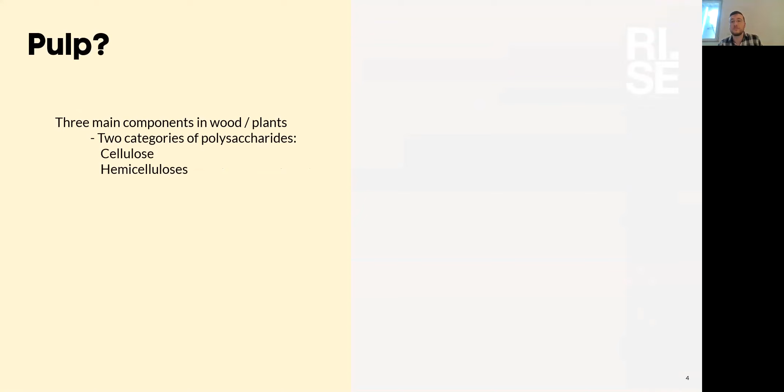Pulp is usually produced from wood, though it can be produced from other raw materials, and it has three main components. Talking about wood specifically, there are two categories of polysaccharides: cellulose and hemicellulose.

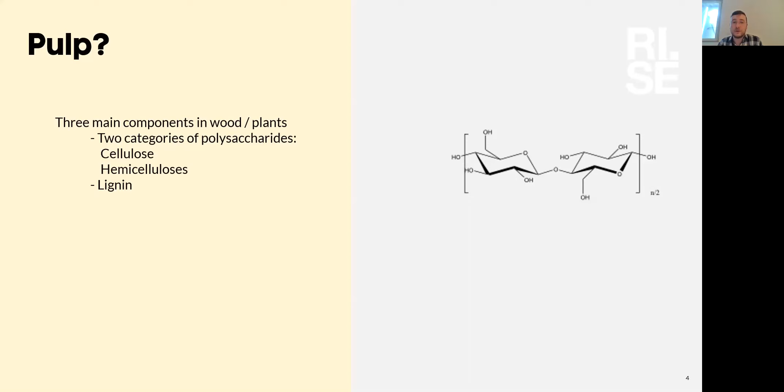Here is a picture of what cellulose can look like. I haven't included hemicellulose because it's not necessary for today. The third component from wood is lignin, so here is lignin.

When we make pulp, what we want to have is basically undamaged polysaccharides—well, it's kind of a utopia to say that, but we want those polysaccharides to be as good and as long as possible. If you look at the picture, you see the square brackets; it just means it can be super, super long, and the longer, the better.

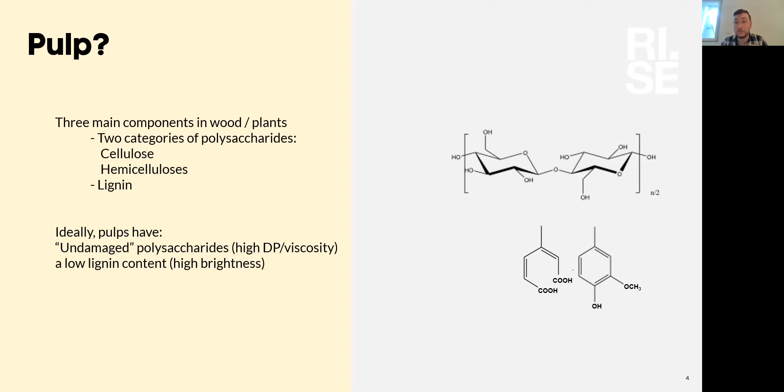For a good pulp, we also want low lignin content. Lignin is kind of a glue that is colored, so we basically don't want it for many applications. Unfortunately, when we remove the lignin, we also tend to degrade the polysaccharides and cut them, or lose some of them.

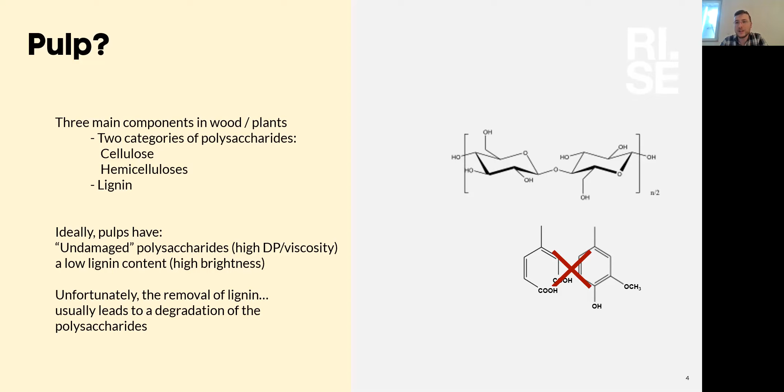Overall, the industrial practice to produce pulp has right now quite stabilized, and you can find several processes, but one of the main processes is the kraft process.

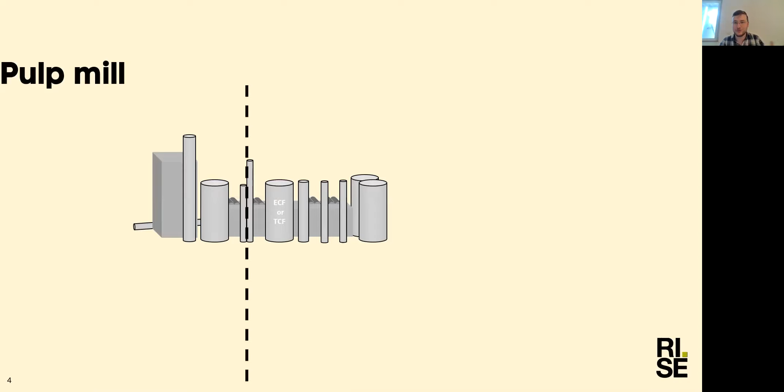So this could be a picture of a kraft mill. You don't get all the elements of the process, but some of them. If we look at this industrial mill, you can basically divide it in two: on the left you would have the cooking, and on the right you would have the bleaching.

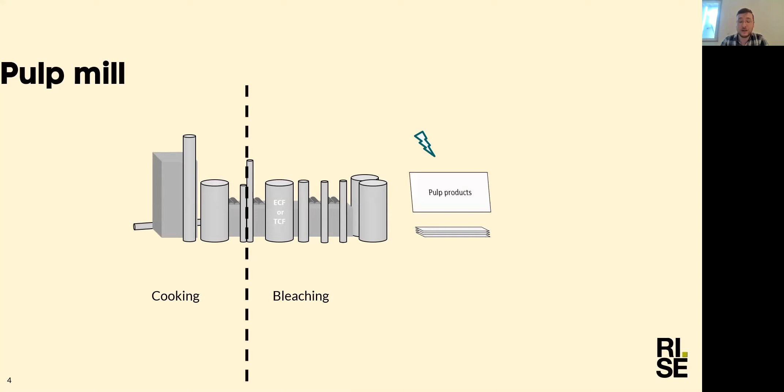The pulp mill is quite robust as a process. It has multiple products, such as pulp obviously, but a pulp mill is also a place where you can produce energy and send it to the network. On the other hand, the pulp mill also has a high consumption of water, and this water that is consumed then has to be treated in a dedicated plant. The pulp mill also has emissions to the air.

So there are a few topics that are a little bit off with pulp mills. I cannot say that pulp mills are not clean, and I cannot say that they are the greenest possible, but I can really tell you that they are getting better and better, and that a lot of changes have occurred during the last decades.

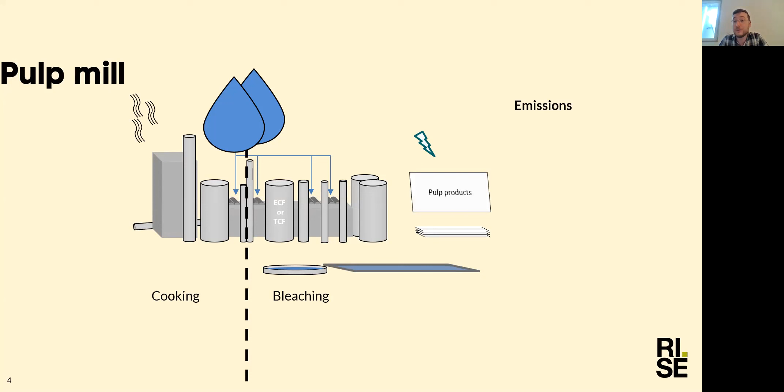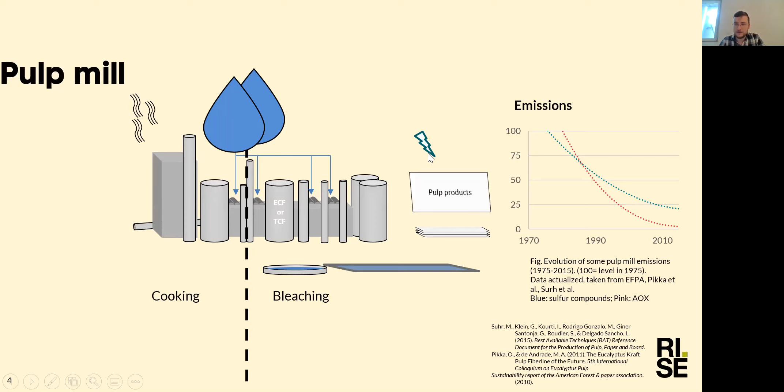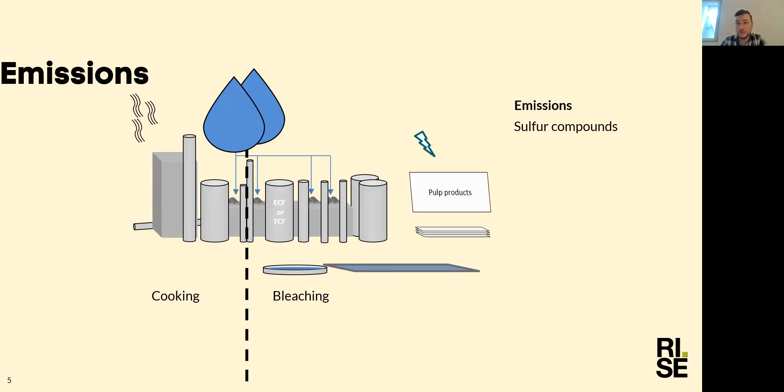In spite of those efforts, the pulp industry is still perceived as a polluting industry. Here are a few emissions you can list, like sulfur compounds that are responsible for the bad smell, amongst other things. We have NOx, specific compounds that can be involved in smog and in acid rain, so they are heavily regulated.

We can talk about CO2, of course—that's too big a topic for today, but I'd love to be working on that a bit more. Of course, the pulp mill will have effluents, as we said. COD and BOD are two indicators of the quality of the effluent: the higher, the worse.

AOX are chlorinated toxic compounds that can sometimes, under some conditions, be found in the effluents of pulp mills. You also have their close cousin, OX, chlorinated compounds that can be found sometimes in some pulp products, directly in the product itself.

One of the problems with all of those emissions—I'm not saying the emissions are too high; compared to 30 years ago, those emissions have never been so low. But at the same time, the very existence of those emissions can pose a problem in the population, and it creates controversies, and those controversies can have damaging effects on the pulp mill, like on the way it runs.

Some pulp mill projects have been cancelled because of the involvement of the population. You also have problems when renewing environmental permits because of this increased awareness of the population. And maybe even worse for the pulp makers, some of those emissions actually lead to technical problems.

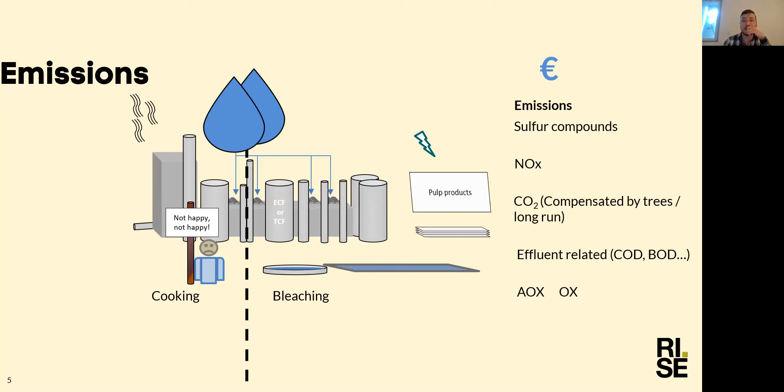So the industry has been fighting a lot to find ways to mitigate those emissions, trying to find new strategies to recover air emissions, to burn them again, trying to deal with effluent in another way, trying to recirculate, etc. But maybe there's another way to look at those things. I will take the example of sulfur compounds and of AOX, and we'll make together this table where we will put the emission and the reason behind this emission.

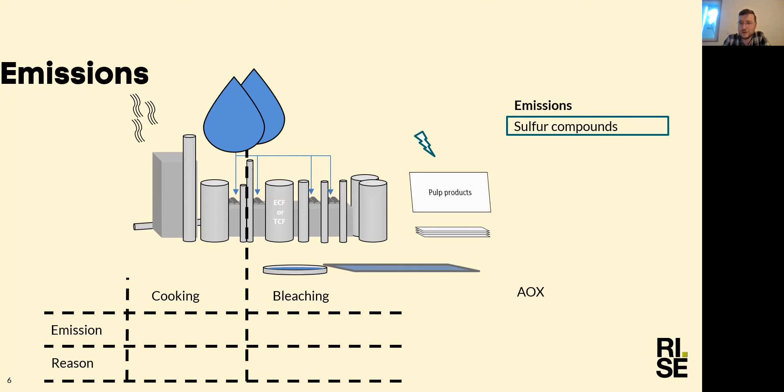If you look at the sulfur compounds, the very reason why you end up with emissions of sulfur compound is because at the beginning of the process, you add or use sulfur. This one is hydrosulfide, the S is for sulfur. If you look at the table, one of the problems related to cooking is sulfur emissions, and this is related to the use of sulfur.

If you do the same exercise with the AOX, they appear because at the beginning of the process, somewhere in the process, we actually use chlorine-related compounds, namely, in our case today, chlorine dioxide.

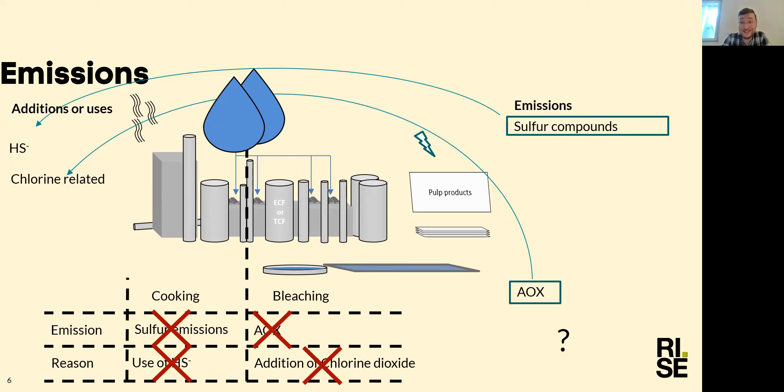Now that we've said that, what can we do? You can see that some specific emissions are just appearing because some compounds are introduced in the process when they were not there at all in the first place. So our belief is that if we stop using hydrosulfide, if we stop using chlorine dioxide, we will get rid of the sulfur emissions, at least most of them, and we would also get rid of most of the AOX. So is it technically possible? Well, with the title of the presentation, you kind of have an idea that yes, we have some ideas about that.

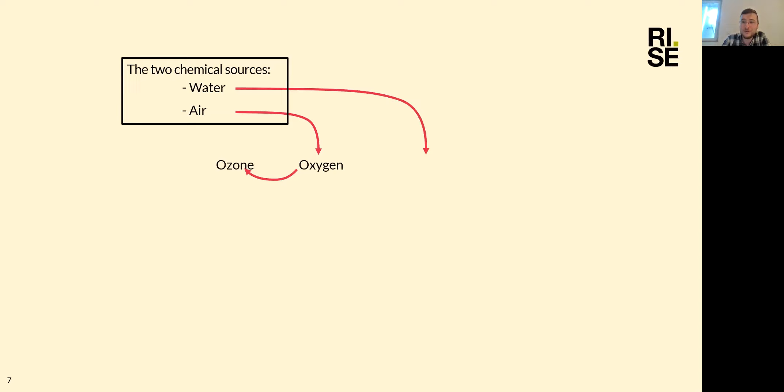We want to have only two chemical sources tomorrow, in the future: water and air. Water and air are quite interesting because air contains about 20% oxygen. If you add a little bit of energy to this oxygen, you produce ozone, a really strong oxidant, probably one of the cleanest. If you combine water and oxygen together through electrolysis, you obtain hydrogen peroxide. Those three chemicals have the full potential to pulp and bleach, to create the pulp and to bleach the pulp. If such a thing existed, it would be called a green chemical island.

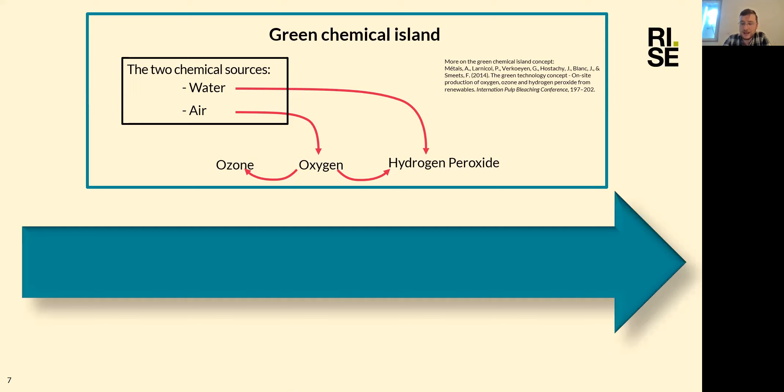If you want to learn more about that, I really urge you to look at Alexis Métais's paper, which is quite enlightening on this concept. So somehow, with those three chemicals, we can do everything. In the next slides, I will present the first volume, called Green Bleaching, showing how to bleach with air and water only. Then I will show a second volume, Green Cooking, and how to cook with air and water only.

Please keep in mind that for the moment it's more of a vision, not exactly a clear and established process, but I hope that some of these ideas will question the current practice of the mills. Back to the things we are going to present, for the sake of time, as I'm talking a lot, as you can see, we will present the volumes in chapters.

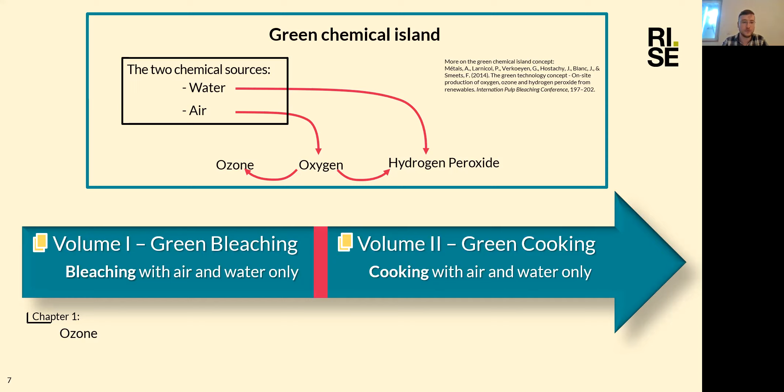The first one will deal with ozone. The second one will combine hydrogen peroxide and alkaline stages. For the second volume, we will talk about oxygen, and actually Claudia will in a few minutes, and then we will talk about the pulping strategies.

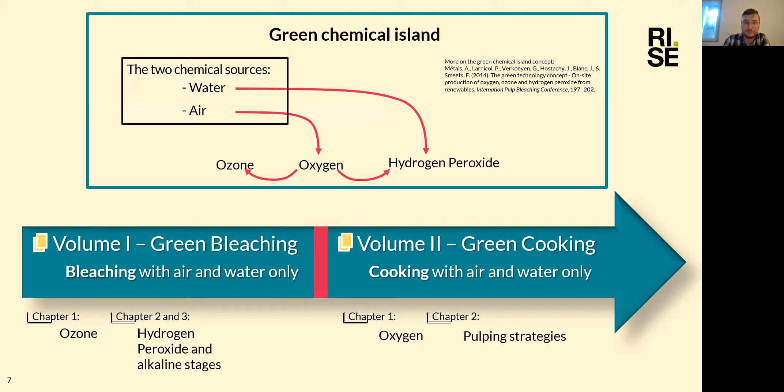So, volume one, green bleaching, chapter one, ozone. There is this common belief in the pulp industry that ozone degrades the cellulose. To tell the truth, it's slightly more complicated.

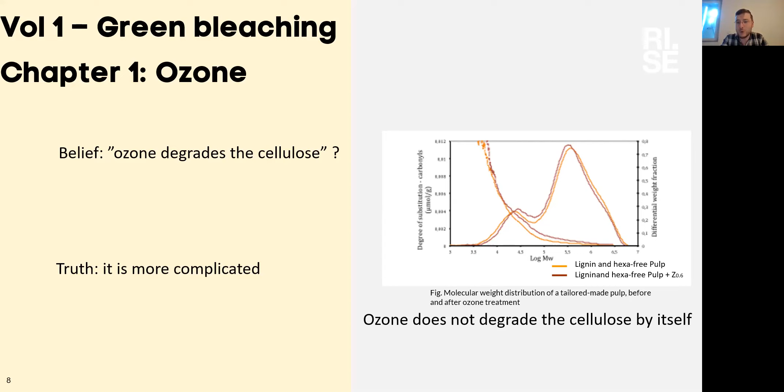For those of you who know more about pulp, you can look at this figure showing the molecular weight distribution of pulp. There are two pulps here: one is a tailor-made pulp that doesn't contain lignin and hexenuronic acid, so it's basically only cellulose. As you can see, the molecular weight before and after the ozone stage are quite similar. So, combined with other results going in that direction, we can easily see that ozone does not degrade the cellulose. It's a bit more complicated.

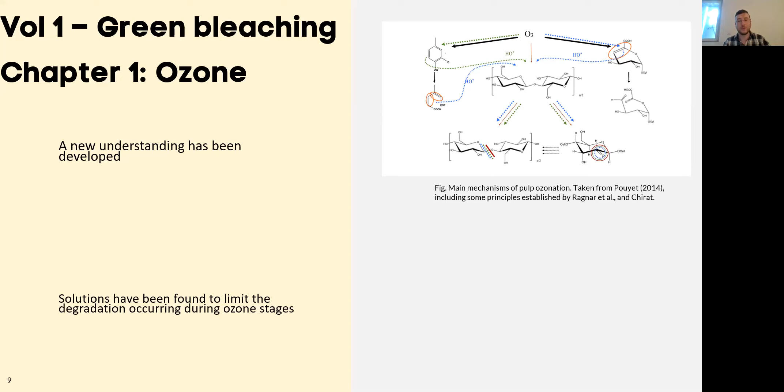To really understand what happens during ozone stages, new understanding has been developed along the years. Ragnar has contributed heavily to that, myself as well. I will not go into the details of this figure; if you want to discuss, you can contact me. But the idea is that we have now identified the reasons why ozone can be a bad chemical for pulp. Now that we know why ozone could degrade pulps, it's time to find mitigation strategies, and I will present one to you.

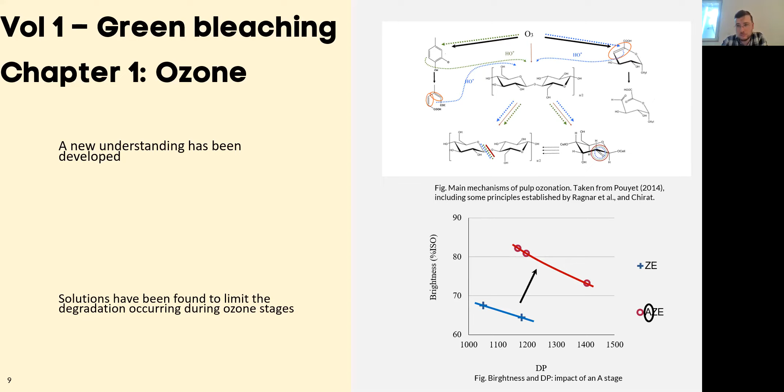So that's just one of the examples of the mitigation strategies that you can find, but this one I think is quite nice to see.

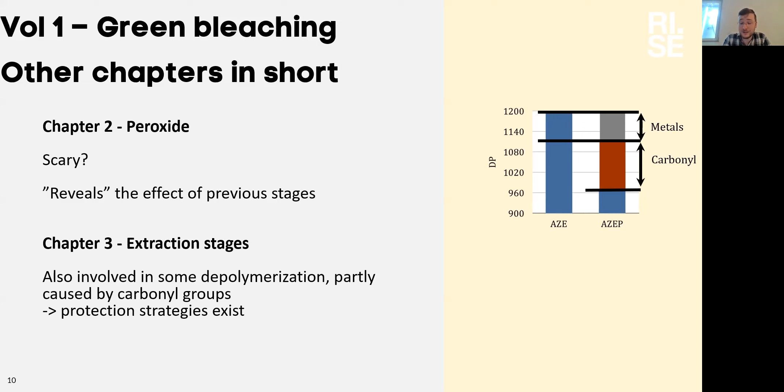The extraction stages can also have an impact on the depolymerization, and this impact is also partly caused by the carbonyl groups. So there are some protection strategies that also exist that I will not detail here. But if you put all of those things together, you can actually reach pulps of high quality.

There are even some more recent results that show that those sequences are actually cost competitive.

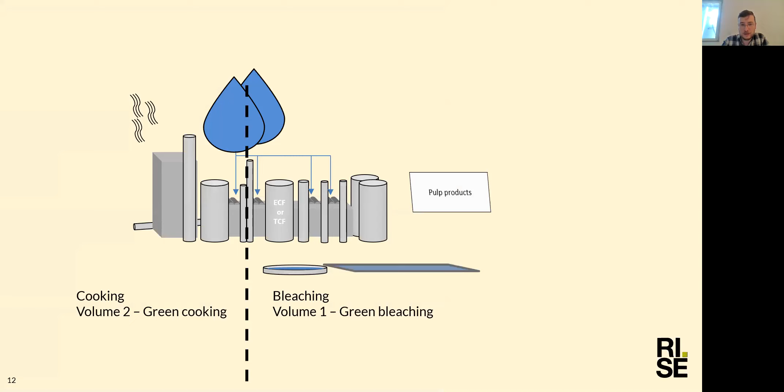Okay, so back to our little mill. Now that we've addressed the volume 1 of green bleaching, let's have a short talk about the second volume that deals with green cooking.

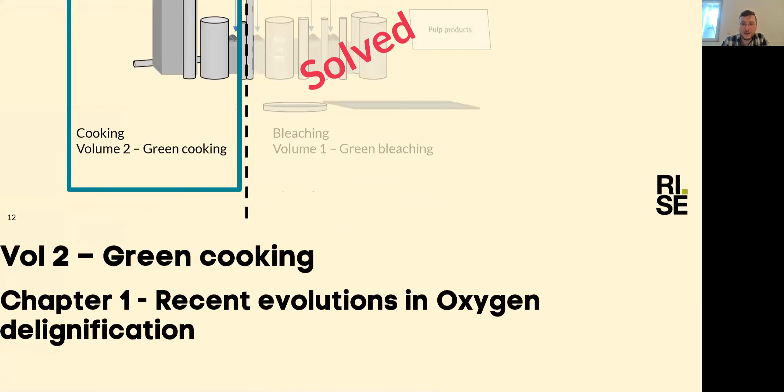Volume 2, green cooking, and I will briefly talk about the recent evolutions in oxygen delignification, and I'll just give you first the oxygen stage goes between the cooking and the bleaching. It can be considered as cooking, considered as bleaching. The point is, it's in the middle.

And you will see in a few minutes results from Claudia. They are really, really interesting and really enlightening, and I will give you a little glimpse into her results. One way to look at those results is to say that you can reduce the cooking time, and reducing the cooking time can actually increase the efficiency of the oxygen stage. Claudia will show you her results, you'll understand.

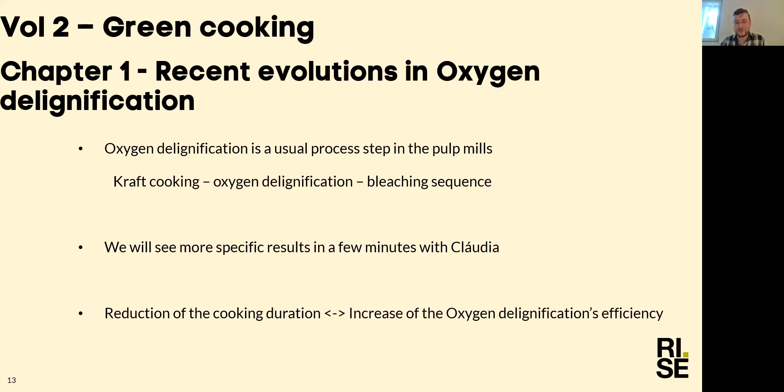So, I don't want to do a big speech on sociology of innovation, but back in history and during the last century now, several pulping processes have existed. You have the mechanical processes, the chemical processes, and the organosolv processes, of course. In the chemical processes, you have the soda cooking, the kraft cooking, sulfite, of course, and I will just talk today about the kraft cooking and the soda cooking.

The kraft cooking contains sulfur, as we've already mentioned. The soda cooking does not. It's basically the kraft cooking without the sulfur and a bit longer.

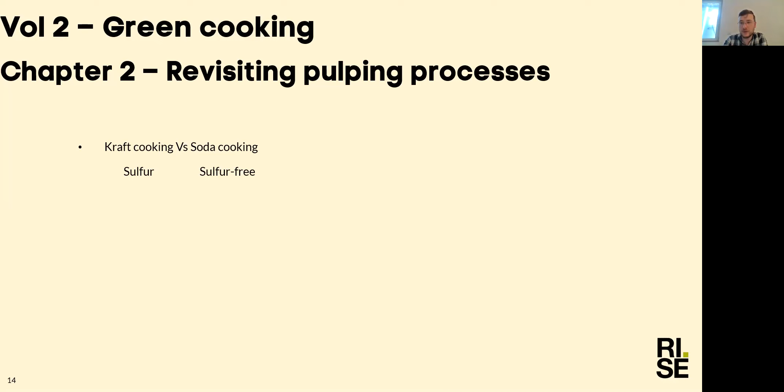Kraft cooking has taken over soda cooking. And the reason why is that kraft cooking is quite good. And it's good because it contains this sulfur. The fact that you have sulfur in the kraft cooking allows for a reduction of the cooking time. Rings a bell, right? And consequently, the pulps are of higher quality, and there is also a higher energy efficiency.

But it's not because the kraft process has taken over that the soda process doesn't work. The soda process works. It's just that it's a bit too long and degrades a bit too much. But if you think back about what Claudia will tell you in a few minutes and the short glimpse I gave you, maybe having this soda process but a bit shorter wouldn't be a problem.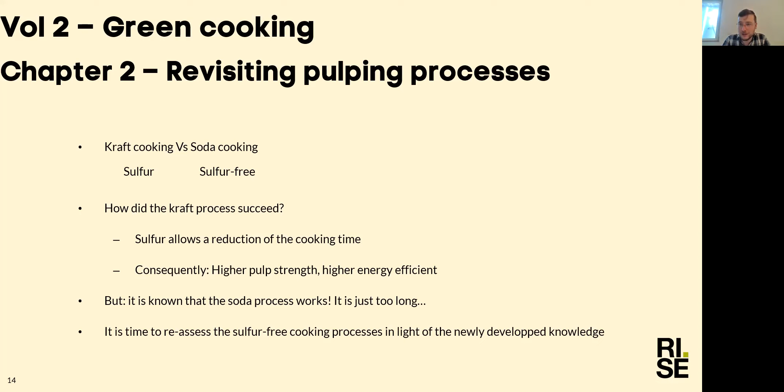So basically, my thought is that it's totally time to reassess the sulfur-free cooking processes in light of the new developments based upon the volume 1 of green bleaching and based also on the knowledge developed by Claudia and other people. So the pulp mill of tomorrow could be a bit like this.

I'm not saying that it will be kraft, that's another topic. But we hope that the pulp mill of tomorrow would have a green chemical island, that it would be able to produce, just from water and air, all of the chemicals required by the mill to turn wood into pulp.

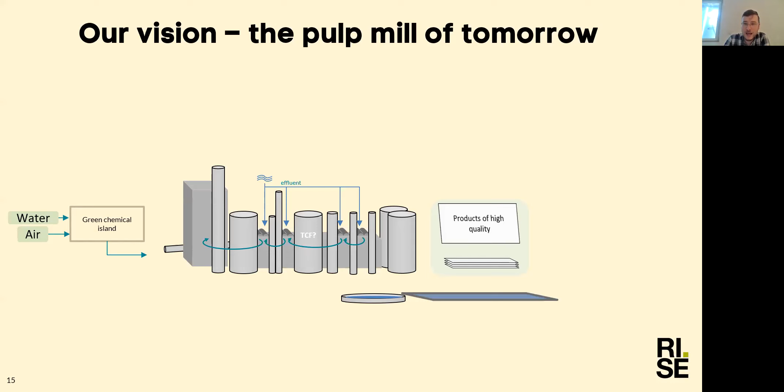We also hope to have a mill with higher water recirculation, and that's even more possible if the sequence doesn't use chlorine. By its design and thanks to the water recirculation, the water uptake could also be lowered by 50%, which is quite interesting. And in terms of cost, those sequences could also be competitive.

We already have results showing that the OPEX is quite similar. And in terms of CAPEX, we also hope that it would be less expensive. The reason why is that if you remove sulfur, you have a recovery system that is way less complicated. So maybe a bit less expensive, at least not more expensive.

Because of the design of the bleaching sequence, it could also be quite a flexible sequence, quite responsive to changes. And overall, the effluent load would also be lowered with lower emissions. And icing on the cake, lower emissions also means that the process would have a higher social acceptance.

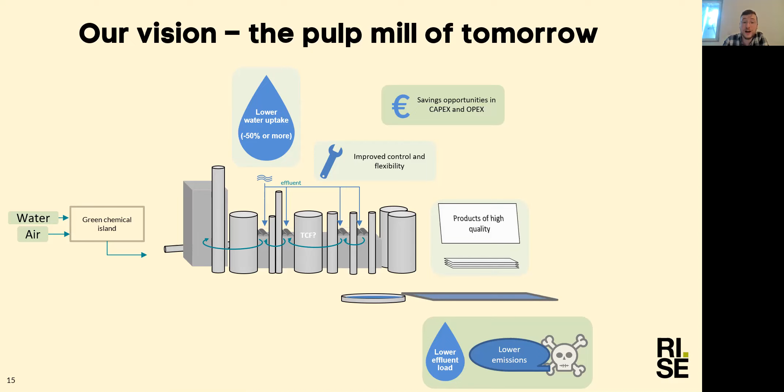So, to reach this vision, right now we are involved in several activities. The main one would be the research program launched by RISE and financed by external partners, and we are investigating fiber line processes.

We are also looking at the functions of the cellulose for other modifications. Of course, we are looking into the water quality and its impact on the process and on the concept of water reuse. And we also obviously still look into the existing processes. We also want to develop new concepts for greener bleaching and also new concepts for new pulping processes.

Overall, one of the reasons why we think we can do that is because we have cooperations with universities. Working with the universities is really a chance to have interesting discussions and to share expertise, to mutually benefit from competencies and resources to which we wouldn't have access otherwise.

It goes both ways. Our aim is really to develop ready-to-use knowledge and ideas, and we also want to prepare the brains of tomorrow for the pulp and paper industry.

So right now we have two ongoing master students, and we also have Claudia, who is a PhD student with KTH. The big interest for us with KTH is that it's just next door, so it's quite convenient in a way, and we hope for even better cooperation in the future and more fruitful results.

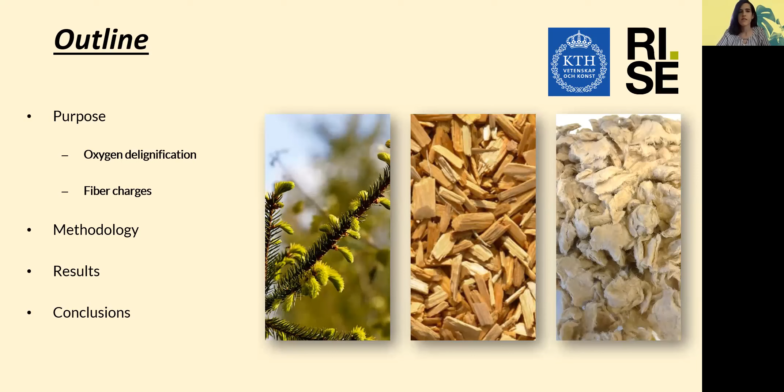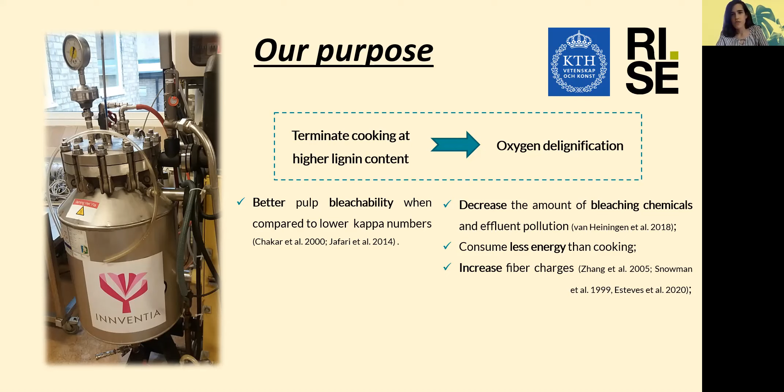So as Frederick already said a little bit, our purpose is to look at oxygen and also look at kraft pulping in a different way, to understand what they are doing, what is the difference between one and the other, and what we can do when we do a shorter kraft pulping or a longer oxygen delignification, or vice versa. The main point here was to terminate the kraft pulping at a higher lignin content and then perform oxygen delignification, to understand the advantages of that.

We thought about this because terminating kraft pulping at a higher lignin content is known to increase the bleachability of the pulp, since we are producing fewer condensed units that are resistant to the bleaching steps. So we can have some advantages there, besides reducing energy, for example.

And by doing oxygen delignification, we can decrease the amount of bleaching chemicals used afterwards, and we can also decrease the effluent pollution. By doing oxygen, we also consume less energy because we use a lower temperature compared to kraft cooking. And most importantly in this case, we increase the fiber charges, because they play the main role here. Overall, by shortening the kraft pulping and adding oxygen, we could have a more environmentally friendly technique that can improve the mechanical properties and also reduce refining energy consumption.

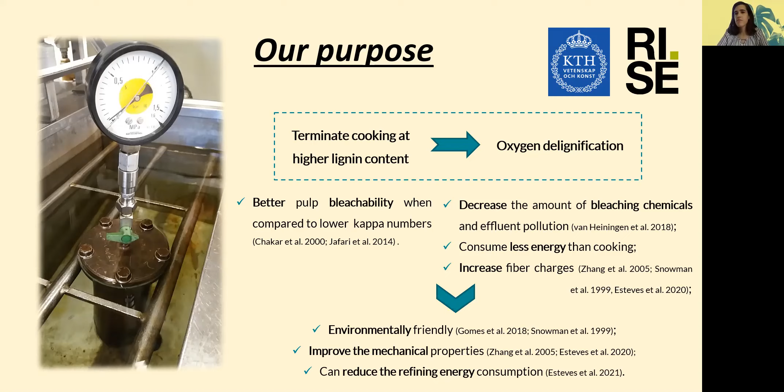So we have a lot of benefits. Besides these, oxygen is also a more selective way to perform delignification compared to the bleaching chemicals. And it's already a well-established technology in most pulp and paper industries, so it's not so difficult to implement a shorter kraft pulping combined with a longer oxygen delignification. We can increase the total fiber charge, and this will lead to an increase in the mechanical properties of the paper. We already have some studies that suggest that.

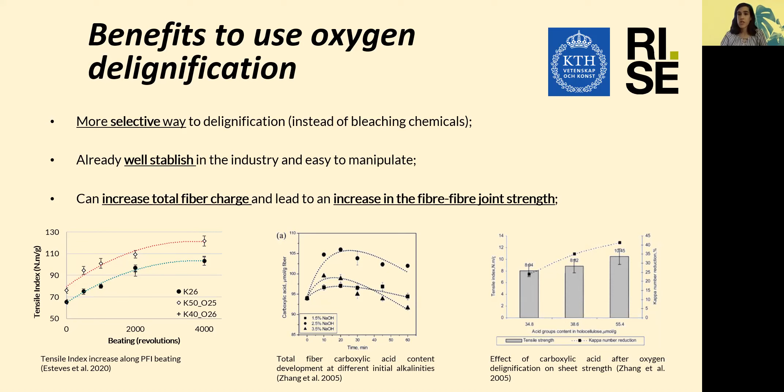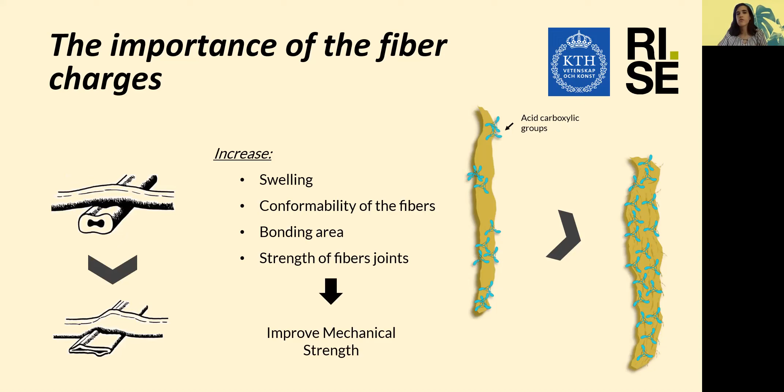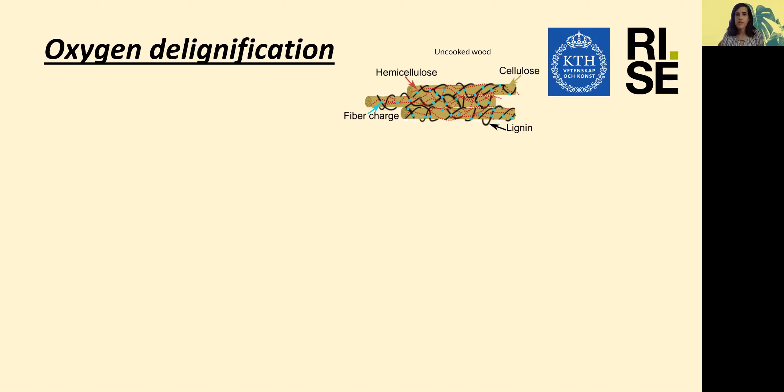This is another illustration, and I'll try to explain the basics behind it. This is a representation of uncooked wood, where the blue dots represent the fiber charges. Fiber charges are mainly present in lignin and carbohydrate. So in the beginning, we have a lot of fiber charges because we have all the components in the wood. But when we perform kraft cooking, we remove a lot of the lignin and some of the carbohydrates, unfortunately.

So by doing that, we remove a lot of fiber charges as well. One way to overcome this is to perform a shorter kraft cooking, so we don't lose so much lignin and carbohydrate, and we preserve some of the fiber charges. Then we do oxygen delignification. By doing that, we increase the fiber charges through lignin and carbohydrate oxidation.

In these two samples, we have the same lignin content, but one has a much higher fiber charge content than the other. The difference will be in the swelling, because this one will be much more swollen than the other fiber. This will greatly increase the refinability of the fibers, which helps the conformability, like I said, and the strength. The other one, without the oxygen and without as much fiber charge, will not have the same good properties.

So the approach I'll show you here today — we did others, but this is just an example — we did three different trials for the same lignin content, which we call kappa number. In this case, it's kappa number 30. So we did three different kraft pulpings with different times; they are the same process but with different times. Then we did the oxygen delignification, with a longer step and a shorter one. So the difference here is the starting point from the kraft pulping.

And then we will compare and try to understand what are the differences between them and what we can gain with one or the other.

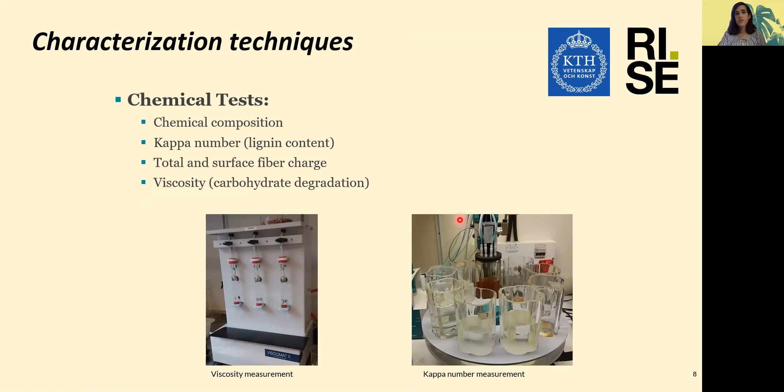We did several characterization techniques. I will not show all of them, just a few. We did chemical compositions to understand the chemistry of the fibers, the lignin content through kappa number measurements, the total and surface fiber charge, and the viscosity to see how much we degrade the carbohydrates.

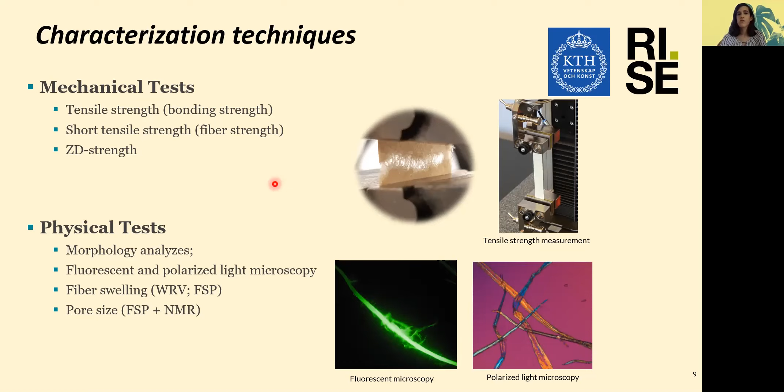And these are the mechanical tests. I will just talk about the tensile strength, but we also did short tensile strength and ZD strength. We also looked at the morphology of the fibers, and we looked at fiber swelling by analyzing the water retention value and the fiber saturation point.

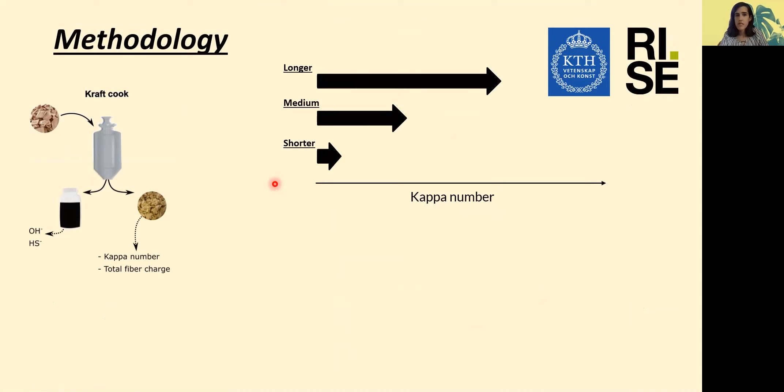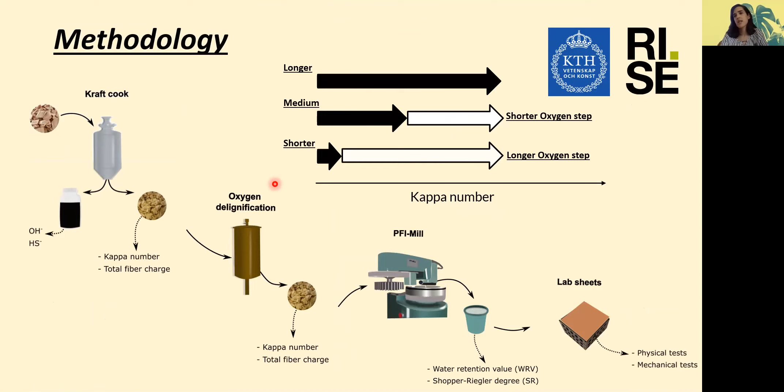So the methodology, like I said, is 3 different kraft pulpings, and then we perform 2 oxygen delignifications with different times, and then we do PFI refining, we do lab sheets, and then we test the mechanical strength of the paper.

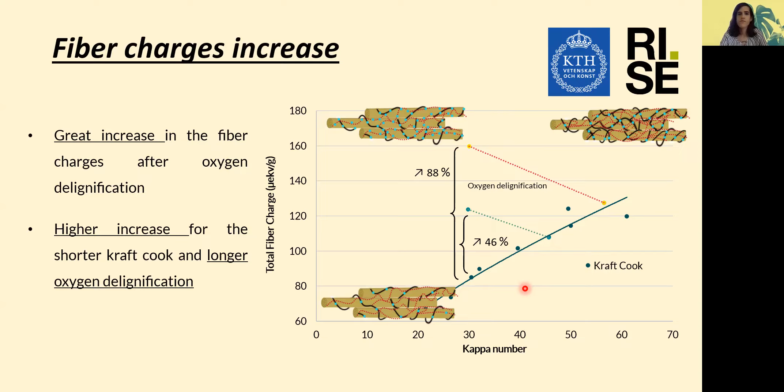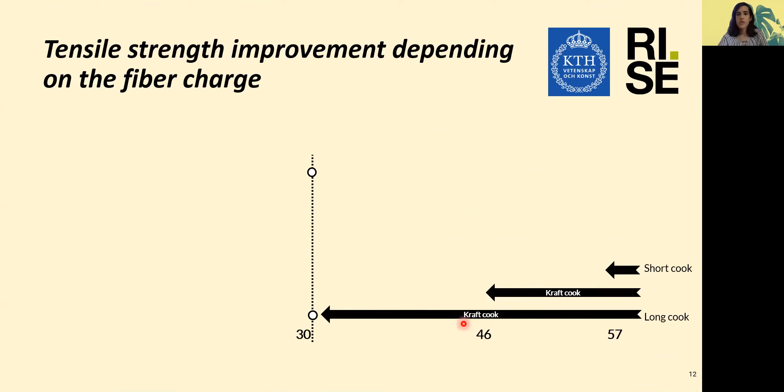Now we look at the tensile strength, comparing at this kappa number. For this kraft cooking, we got this tensile behavior along the PFI revolutions. Then we compare to the oxygen delignification starting from here to kappa 30, and we didn't have any improvement in the mechanical strength, even though we had higher fiber charge. Then we did another trial starting from a higher kappa number to the same as the other two, and here you can see we had a significant increase of around 14% in the tensile index. That is quite interesting.

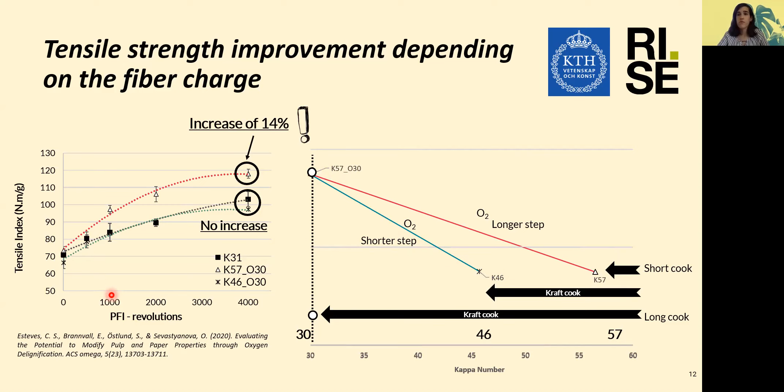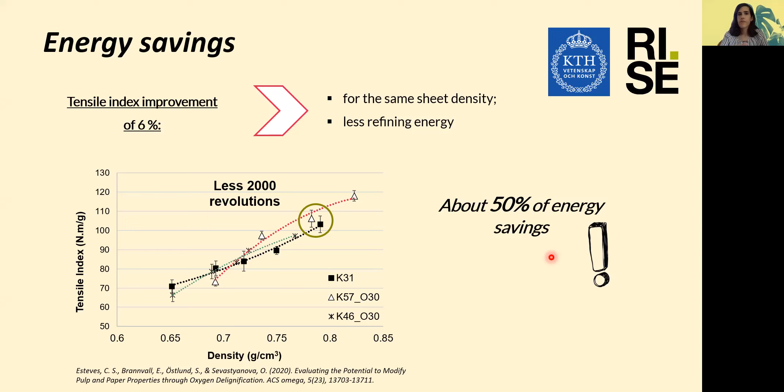You can ask, what about the density? Because tensile strength depends on density. So when we look at the tensile index along the density, you can see we have a tensile index improvement of 6% for the same sheet density, but with less refining energy. We are comparing this point here from the kraft cooking that has 4,000 revolutions to this one, an oxygen delignification with similar tensile strength but with just 2,000 revolutions. So we got around 50% energy savings when we use oxygen delignification in a way that has a higher increase in fiber charge.

The swelling effect is also very important to see. We have the graph with water retention value and PFI revolutions. You can clearly see the difference between this one, the black, that is the kraft cooking, and the other one with a shorter oxygen delignification, which gets a slight increase. These values are related to the total fiber charge we got from the fibers. The big difference is this one, which had the 88% fiber charge increase. The increase in water retention value is much higher than the other one with not so high fiber charges. So this one will be much more swollen than the other, with the properties I mentioned in the beginning.

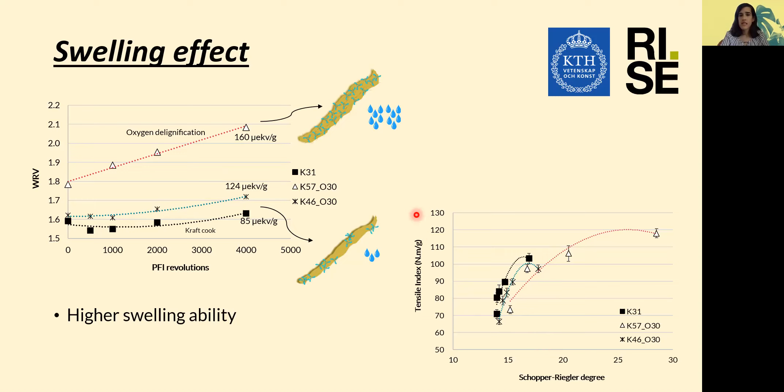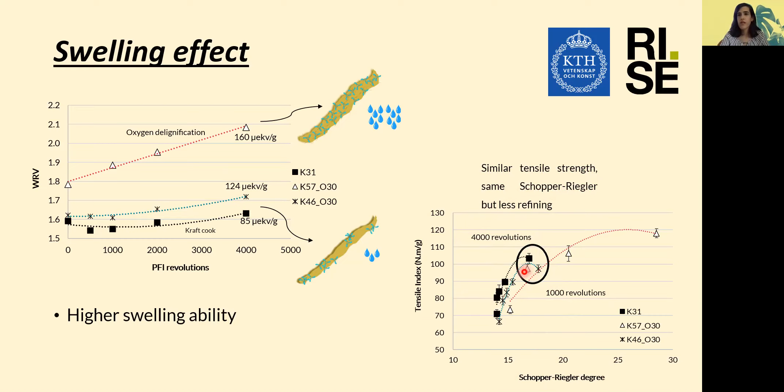It's also interesting to look at the tensile index and the Schopper-Riegler degree. If we look closer, we have similar tensile strength with the same Schopper-Riegler, but with much less refining energy: 4,000 revolutions for the kraft cooking, and just 1,000 revolutions for the pulp when we use oxygen delignification.

Besides that, we also looked at oxygen delignification after a high alkali impregnation, and we can see that we can have even more savings. One of my supervisors, Elizabeth Brännvall, has shown that we can increase the yield from the kraft pulping when we use a high alkali impregnation instead.

And we did the same. We did the standard impregnation and the high alkali impregnation, and then we did the oxygen delignification to see if we can have the same improvement in the mechanical strength.

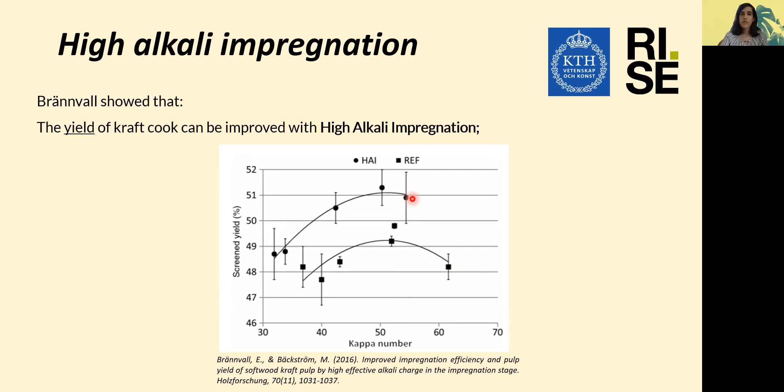1.2% of yield improvement in total yield. We can have around 3% of wood savings. That will result in €1 million per year of savings when we look at the average Swedish production of 700,000 tons per year. So I think there are very interesting conclusions and very interesting points.

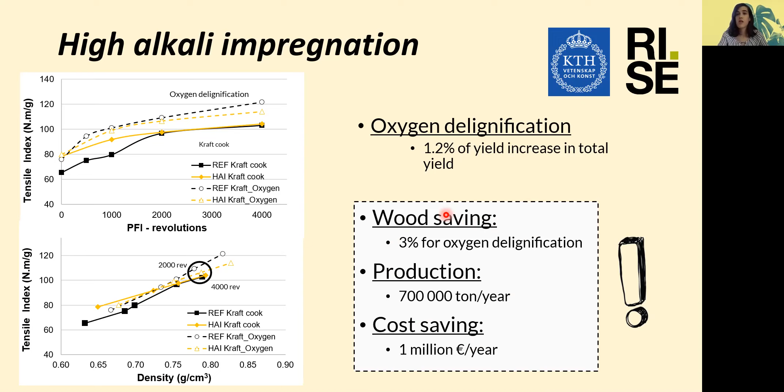So as a conclusion, we can see that oxygen always increases the fiber charges, but not always do we get the mechanical strength improvements. This will depend on the way that we do the oxygen delignification, if it is starting from a higher kappa number or a lower kappa number.

And what we saw was if we start from a higher kappa number, a higher lignin content, we have a much greater ability to increase the fiber charges by a much higher percentage, while if we just start from a lower lignin content, it's less. So this will depend on the oxygen conditions.

And this increase in fiber charges will lead to an increase in the fiber swelling. And this increase in fiber swelling will lead to a better refinability. And therefore, we will have much higher tensile strength.

And besides all that, by doing this approach, we can reduce the energy by reducing the kraft pulping step. We can also increase the yield, and we can save energy by getting the same tensile index, but with lower refining energy.